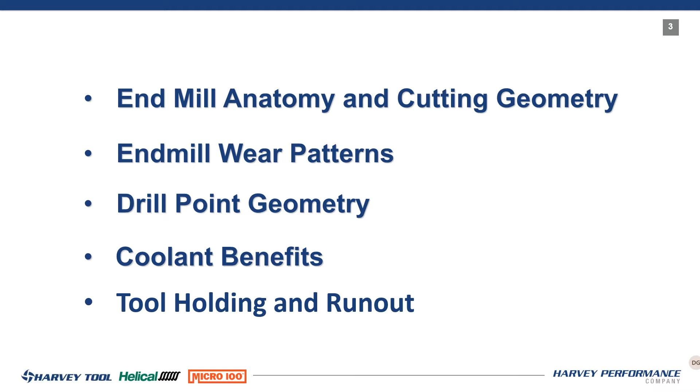So let's jump into end mill anatomy first of all. The first thing, which is the most common, is cutter diameter on an end mill. Every end mill has a diameter that you're actually speccing to your machine with that tool. The measurement is basically taken on the outside of the tool. We call it the margin, even though it's up sharp on end mills.

Some aluminum tools do have a margin on them, but it's taken usually on the first 10% of the diameter of the tool. Now, this measurement is actually what you're going to put in your software to control the dimensions that you put on your material that you're actually cutting. So I wanted to kind of bring this up with the cutter diameter to let you know.

Usually industry standard tolerances on an end mill, a 1/4 inch and up, is a -0.002 on the cutter diameter. So just be mindful of that when you're actually getting a 1/2 inch tool, that you either can mic the end of your tool or you can laser mic it, check that diameter and make sure you're inputting that information into your software to make sure that you don't cut it undersize.

Either that, or the fact that I am an old school machinist, you can tell it that you have an oversized cutter, in which case you'll stay away from your wall and you won't cut undersize. But critical cutter diameter is the number one. That's the OD of the tool running all the way through the shank.

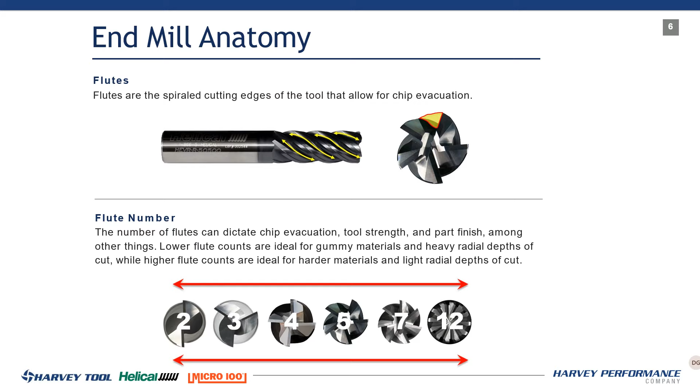You can do variable helix, where instead of being 38 degrees for all 4 flutes, it will actually be 38 degrees on one, 35 degrees on another, maybe 32, and then back with a 37. That'll give you variable helix to offset that flute and that vibration.

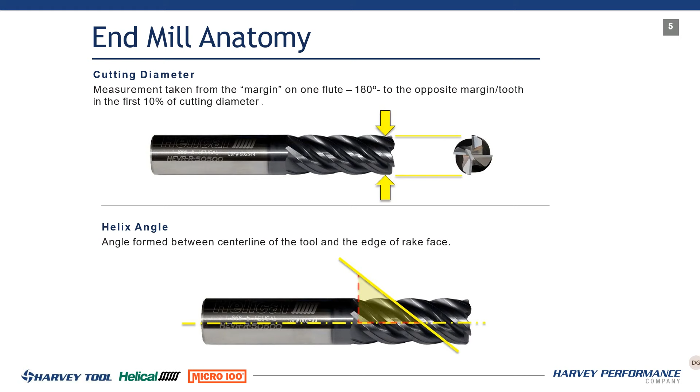You can also go with a progressive helix, where the helix starts out at 1 degree and then changes as it ramps up the spiral. So maybe it starts at 32 degrees and finishes at 38 degrees. There's really 3 ways to break up those harmonics.

Helical Solutions actually runs with a variable pitch. We've done testing - larger diameter works very well to run a variable pitch. Harvey Tool on the smaller tools runs a variable helix, so the helix varies on that. Works a little bit better on smaller diameters. Some cutting tool companies will do a combination of both, and there's benefits in that, while others will just change each one of those formats. But what you're trying to do is break up those natural harmonics, which is going to give you a bad finish, poor tool life, and chipping.

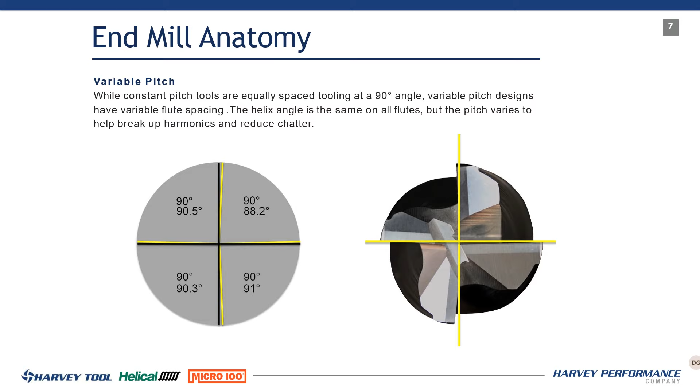So axial relief - if you look down at the end of an end mill, the end has to cut. In most cases, whether you're ramping or plunging, you need axial relief on the end of that tool. Basically there's a primary and a secondary relief in there. The axial relief on the end causes the tool not to rub - it gives it clearance, a primary and a secondary. So when you're ramping on the end of the tool, you're cutting on the corner, but you're giving the tool relief so the chips can evacuate and it doesn't rub and cuts free.

Now if you have one tooth, if you look at this 5 flute, you can see you have one tooth to center. Most end mills, solid carbide today in this market - I'd say almost all of them - are actually center cutting up to a certain diameter. You want to make sure if you're going to plunge with that end mill, meaning you take it and plunge straight down. Now, is plunging with an end mill recommended?

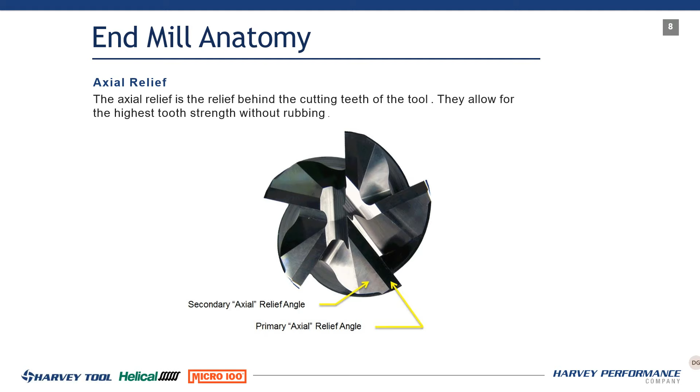No, I would rather see a helical ramp where you're actually spiraling down to make your cut to get to the bottom of a hole or surface. But will an end mill plunge? Absolutely, 100% an end mill will plunge. I would recommend if you're plunging to use like a G83 peck cycle or something like that with an end mill, because the chip evacuation on plunging an end mill is not very efficient. It's not going to work as well as using a drill or another method to get to the bottom of that hole. But the end of the tool needs clearance in order to do that.

Core diameter. Core diameter is very important to an end mill - it's what's going to reduce your deflection, and your deflection is what's going to cause all kinds of problems. So when we have a smaller core, we get maximum chip space, smaller number of flutes, and it decreases the tool strength.

So what we want is, in any application, to get the largest core as possible, especially when doing high efficiency machining where you're taking a long axial depth of cut and a light radial depth of cut. This is HEM - we're going to do a whole training on this, so I suggest you join us. The HEM presentation we're doing is going to be great. But when you're running these HEM techniques, you really want to start looking at the core of your cutting tool, because you don't need as much chip evacuation, and that core is what's going to help the rigidity of that tool.

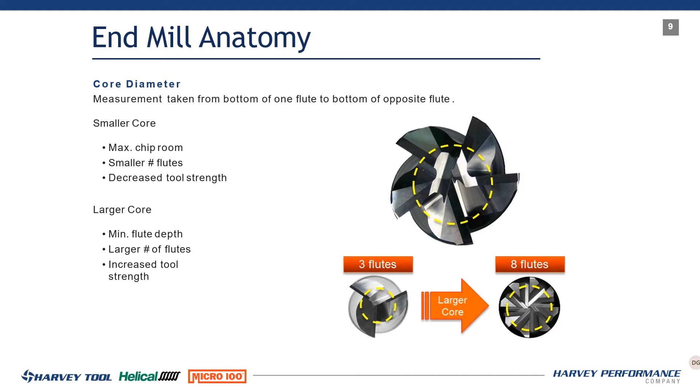Some people will do oversized cores, some will do a standard core - you can find different variations of this. It's good to consult your vendor for end mills to find out what core is recommended for your tool path. But core strength is key, and core strength is basically what's left over after the flutes are created on your end mill, or a drill too as well.

On a drill, it's called a web. I have this standing, not argument, with some people because I'm a drill guy, but it's a web on a drill, it's a core on an end mill. So just to differentiate those two.

So the end gash is pretty obvious. Really, the end gash on the end of the tool is there to support the end cutting geometry. It's giving you your chip space, creating your clearance. You have to be very precise in grinding all these features together. At Helical Solutions, there's a huge science behind creating this geometry because you don't want to overcut the gashing and make it weaker so it doesn't perform. But you also don't want to undercut it, because then you won't have enough chip space and you'll get the opposite effect. So the end gash is what actually creates your clearance for the chips when you're plunging, when you're ramping, to get them out of the end of the tool and to create your center cutting and everything else.

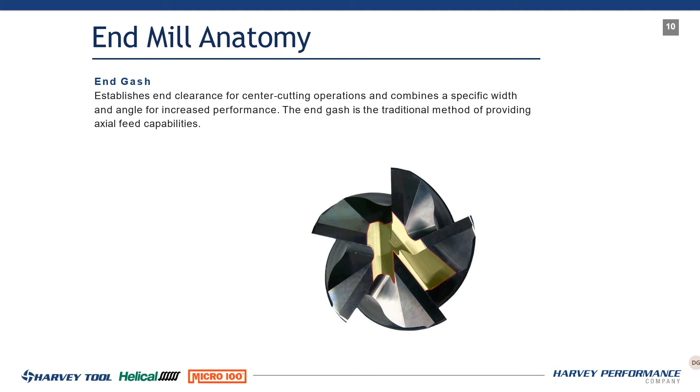This is the only animation I have on this slide. So there's my graphic. The TIR is a little bit off on that tool, but that's all I could throw in there for you. So let's talk about radial relief.

We talked about end relief, right? End relief creates the space we want so we don't rub when we're plunging and ramping down. On an end mill, we have radial relief, which is on the outside of the end mill. The end mill cuts on the side, peripherally. So there's three types of relief you can put on an end mill, all important when you're choosing the right end mill for the right material. They all have their purpose and they all work in certain materials in certain situations.

The first one is a cylindrical relief. Now, cylindrical relief is more seen in drills than in end mills, but there is cylindrical relief on end mills, mainly in non-ferrous end mills. What that means is you have a margin on the end of the tool that has no relief in it. It's cylindrically ground, round, as if you're grinding the whole tool. You're leaving a little bit of that cylindrical ground on there, and then doing a primary and a secondary behind that.

Mainly run in non-ferrous materials, mainly to stabilize the cutter as it cuts. A sharp cutting edge in non-ferrous material is going to want to grab, chatter, chip, do all that stuff. But by adding a margin on the end of that tool, microscopic, depending on how large it is for different materials, it will stabilize the cutter. It will get it to stop chattering, depending on what kind of axial length cut you're making. So that's your cylindrical relief.

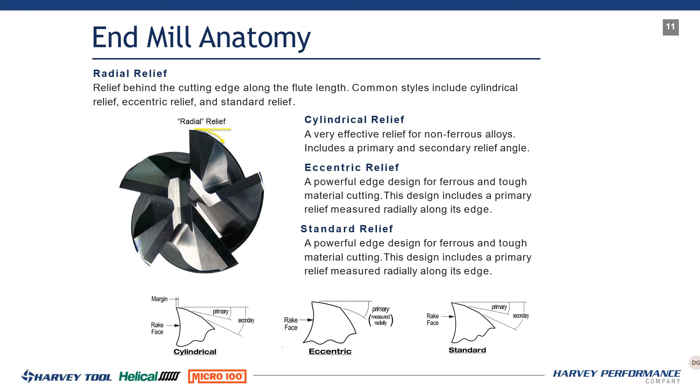It'll prevent rubbing, but it'll also give you one of the weaker cutting edges as well. So those are the three reliefs: you have a cylindrical relief, an eccentric relief, and a standard relief. Hopefully that helps explain the geometry a little bit more. We can get into more detail at a later date.

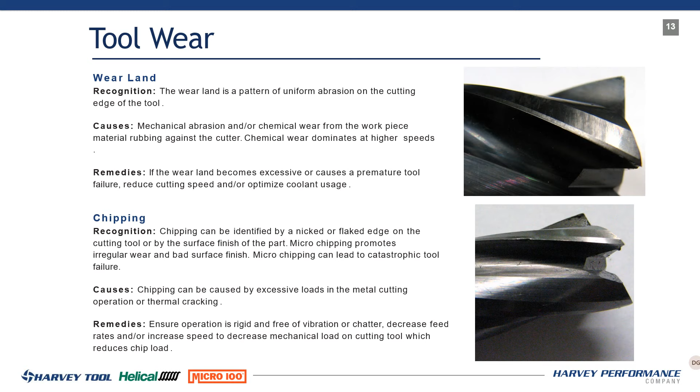That's what happens if you have the ideal situation — your work holding is good, your spindle's good, you're not running out, you're not hanging out of the holder. There's a million other things, but we're trying to stay focused on how to fix the tool if you've identified all the other problems with your situation. Remember: if you're chipping, it's too much feed. If you have a wear land but you're burning up the tool and it's wearing out too quick, flattening the end, it's probably too much speed, too much surface footage.

So the next one's thermal cracking. This is a good one to dive into. In milling, cracks perpendicular to the cutting edge are the most common type of thermal cracking. These cracks propagate slowly and lead to accelerated wear and chipping.

So what causes thermal cracking? Ineffective coolant application, exaggerated temperature fluctuations, excessive feed rates. What we're doing is bringing heat in, then throwing coolant on it, cooling it down, heating it up, and that causes thermal cracking.

I don't have a theory on this, I get all my information from experience. It's always good to consult people that have experience. A lot of people ask me, do I run coolant? Should I not run coolant? What should I do with this material? How do you suggest that? I'm going to give you my insight on this.

It all depends on the tool path you're running. Tool path is king. With running an end mill, running all these tools, tool path is king. The first thing I'll ask you if you have a problem is, what's your tool path? Because if you're running an HEM or high efficiency tool path—your adaptives, your dynamic milling, your MasterCAM, your iMachining—heat does not become a problem as much as it used to in traditional tool paths.

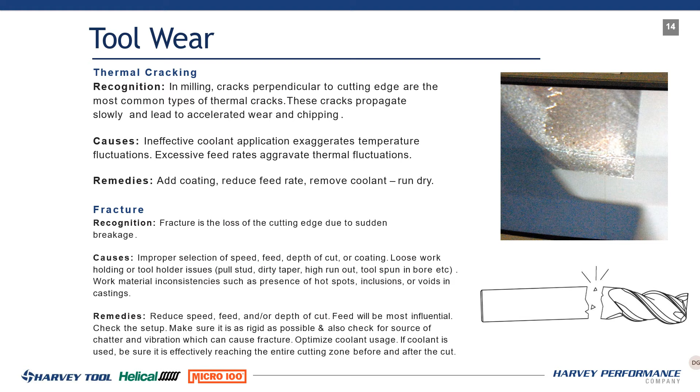So the remedies are pretty obvious. If we're breaking, the force is going to be huge. The first thing we want to do, once we've identified there's no problems with everything else, is look at the force on that end mill. Carbide's very resilient, it's tough—it's going to want to perform to the best of its ability. So if it's breaking, there's something induced in your environment that's causing that tool to break. We need to dissect that, find out what it is, and get it fixed.

So to wrap this up, there's two basic problems we have with tool wear: thermal stresses and mechanical stresses. Your thermal stresses come from workpiece inconsistencies. Let's talk about the workpiece.

Let's talk about the material we're cutting. This is a big thing as an application engineer—we purchase stainlesses, alloy steels, low carbon, high carbon, super alloys, Inconels, and stuff like that. Do we know the consistencies? Are we buying from a reputable place? Are there hard spots in that material? What are the workpiece consistencies and inconsistencies?

Work hardening is a big thing. Certain materials, austenitic stainless steels, Inconels, want to work harden. If you're not taking the right speeds and feeds, you'll make the next cut harder than the first. Usually an end mill likes to settle in and make that first cut thinking everything's going to be straight and good. So if you start work hardening your material by not taking the right depths of cut, that end mill won't survive long, and that could give you catastrophic failure.

When we get into drills, work hardening matters too. How many times have we done a lot of tapping in austenitic stainless steel and the tap keeps breaking, and we think the taps aren't working? I'm telling you right now, it's not the tap's fault—the drill is probably not doing its job. The drill is probably work hardening the hole, and that could be a lot of your problem. So be mindful of work hardening in certain materials and make sure you're taking the right chip load so that doesn't happen. Heat resistant materials are really huge for work hardening.

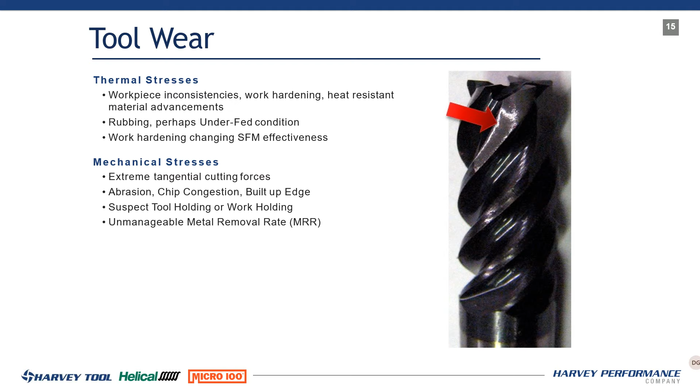I have a thing called the MRR triangle that we'll be launching in another video. Just to give you a snippet and whet your appetite for next time: the MRR triangle is basically three things you control to get the best optimal material removal rate, consisting of axial depth, radial depth, and feed per tooth. With this triangle you can do amazing things to fix your problem without changing cycle time or reducing tool life. Very, very good. That'll be coming soon.

So let's jump into drill point design and application. Like I said, I'm an old school drill point guy. I started, believe it or not, at a company called Precision Twist Drill in 1987—yes, that's how long I've been doing this. I started working on points for all drills, high speed, and then I got into carbide.

So very important—the drill point is one of the most important. No, wait a minute, not one of the most—it is the most important part of a drill. Let's look at a drill in three phases: a drill makes a chip, a drill carries a chip, and a drill gets rid of a chip. That's it. So your drill point is making your chip, the flutes are there to hold the chip, and the helix is there to evacuate the chip.

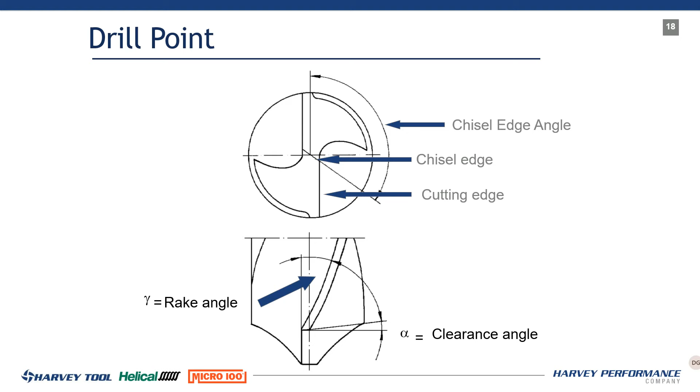It's very important to make sure the right point geometry is there for cutting your material. This consists of a chisel edge angle, which is the center of the tool, a chisel edge, a cutting edge, a rake face angle, and then you have clearance angle on the point geometry. This is where it's very critical.

So let's dissect the drill point. The drill point is the working end of the tool. That's what's doing all the work because it's making the chip. The chisel edge is the first point of contact on the drill, the center of that drill. The chisel edge creates the major thrust force, the force that's being put on that drill, whether it be high-speed steel, carbide, powdered metal, or ceramic.

I'm not sure if there are ceramic drills right now, but for some of the Inconels it's probably not a bad idea. So it's creating all that force. The chisel edge angle, its accuracy, along with the accuracy of the alignment of both cutting lips, control the hole's position, size, and straightness.

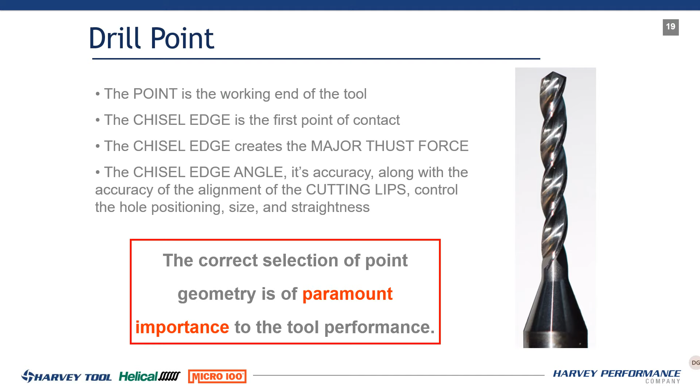So the correct selection of drill point geometry is paramount to the tool's performance. Because if you add force to the drill from the point, your hole is going to walk, you're going to get bad finish, you're going to break, crack, fracture, and everything else. So it's very important to create the least amount of force with the end of the drill because it controls the drill chip formation, the size and shape of the chips, and the chip flow through the flute.

It controls hole size and accuracy, controls the size and amount of burrs produced. The right point geometry and selection of point geometry is going to control the burr at the top of the hole and the burr at the bottom of the hole, the exit burr. This leads to increased secondary operations, deburring, flipping parts, and everything else. So you can get the right point geometry that's going to reduce that.

It increases strength of the cutting lips on the outside of the tool. What's the first thing to go? The outside of the drill—cracks, fractures. Right point geometry reduces cutting lip wear and reduces the amount of heat generation. Heat is a killer.

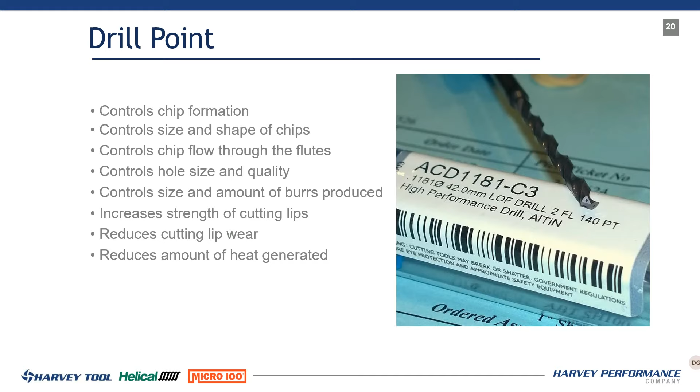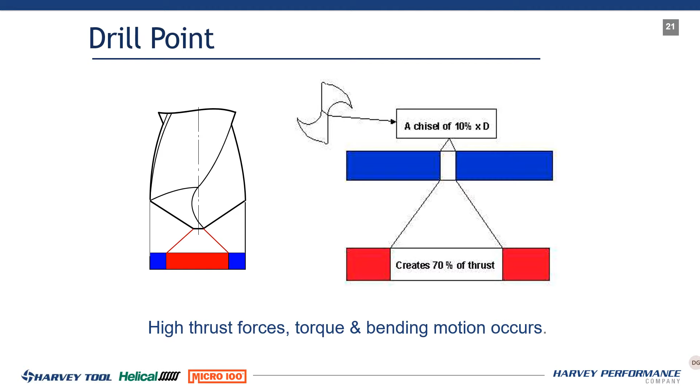So let's take a look at this. High thrust forces, torque, and bending motion occur. The chisel edge, the end of the drill, controls the web—remember, web on a drill, core on an end mill. The end of that drill, a chisel of 10% of the diameter, causes 70% of the thrust. So if we look at this as a standard drill, 10% of that diameter creates 70% of the thrust.

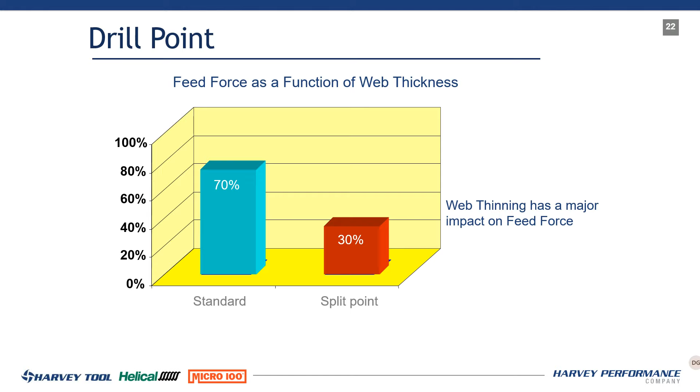If we can thin the web, find a drill with a split point geometry, you are going to reduce the thrust force on the drill by 40%. High speed drills are a little more prevalent in cases where you don't have the web thinned, but the split point has a lot to do with the thrust force on the end of the drill. It will reduce the thrust force by 40%.

Split point drills are very critical, typically 140-degree split points. The main advantage is reduced thrust force, but that's not the only thing. It manages the chip formation and gives you a couple more cutting edges, so it's going to break up that chip, make it a little smaller, and help evacuate it through the flutes. It also improves centering ability, helping the drill self-center.

High speed steel drills will walk a little bit more; carbide doesn't walk as much. So if you're even using high speed or cobalt drills, you're going to want to find a drill with a split point, and you might not need to spot the hole. When I use carbide drills, I hardly ever recommend spotting in some cases—though there are advantages to spotting. But if it has the right geometry, the right split point, it will self-center itself.

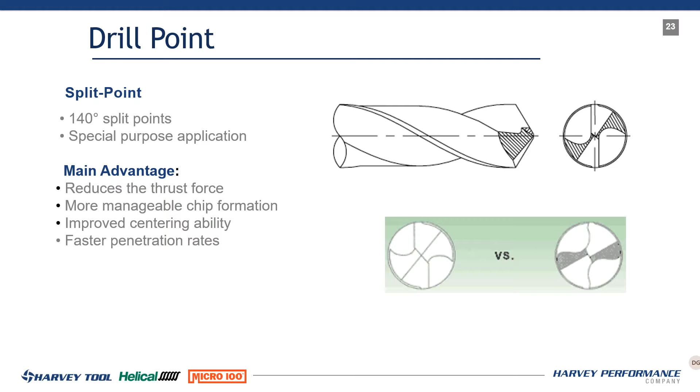And you can get faster penetration rates too. So now maybe instead of running 2% of the diameter on a feed, we can run 4% of the diameter. Or instead of 2 thou per rev, we can run 4 thou per rev, just because of that split point geometry that's actually on there.

So let's take a look at the coolant benefits, and then we're getting close to wrapping up here. Bringing coolant into a situation where you're using an end mill or a drill actually serves three purposes, not just one.

We're not just cooling - the whole word coolant sounds like coolant, but we're cooling the heat zone. That's it. But number one, and first and foremost, running the right coolant system, whether it be a flood system...

...or a through coolant, really helps and assists in evacuating the chips. Very critical - one of the main killers in end mills is recutting chips. That's a huge thing, we do not want to recut chips. And if we don't want to recut chips, we either got to use an air blast or we got to get that coolant to move the chips out.

That's number one. Number two is it provides lubricity at the cutting edge. The coolant not only is going to cool, but it's going to add lubricity. It's going to make the chip slide down the flutes easier. We're trying to add the right coatings to the materials to take the porosity out of the cutting edge, to give the slickest surface, to make sure the chips don't adhere to the cutting edge. Very important in your titaniums, very important in your aluminums. We need the coolant to add lubricity.

And then number three, offers heat dissipation, right? We want to reduce the heat as much as possible. Taking the right strategy, the right tool path is going to help do these things, but adding the coolant is going to benefit. Remember before when I talked about, should I run coolant, should I not run coolant? These are the things and the advantages - with me personally, where I've run tests for hours with coolant and without - these, I think, are some of the benefits you actually get by bringing in coolant. You're not only just cooling the surface, you're evacuating the chips and not allowing it to recut chips. You're adding that lubricity and you're bringing heat dissipation.

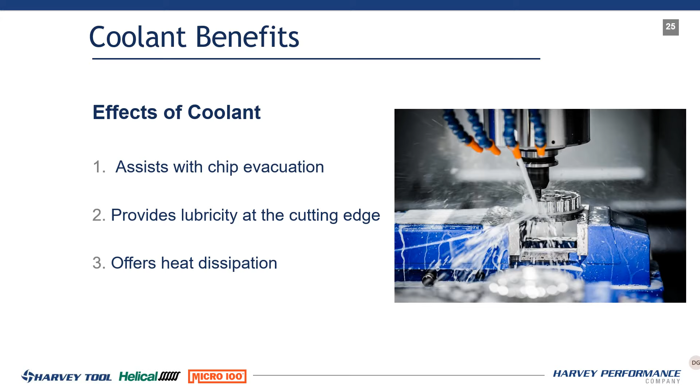Now, there are reasons to not run coolant. Don't get me wrong, I'm not saying that there's not situations not to run coolant. Coolant sometimes is an added cost. I think it's a savings, but sometimes it can be an added cost, and it can make machines a little bit dirtier and dingier when it comes to that. So very important.

So let's take a look at a good, better, best scenario. If you look at these three situations on coolant benefits, you got a good situation, which is like an MQL system where you're just kind of putting coolant on intermittently. So you're not really getting the benefit of the coolant flush, but you're getting the lubricity and you're getting a little bit of cooling effect.

The better situation is where you're running a flood coolant, where you got your lines coming around, you're actually flushing the chips. Even if you're drilling where this scenario is showing, you're getting the coolant all the way down to the point of the drill. You're going to get that a lot better with a coolant flood than you will with like an MQL system, because it's really going to get you when you're pecking, or it's just going to add that lubricity to the outside of the tool as it comes out of the hole.

And then your best situation, even on end mills, is a coolant through situation. Whether the coolant through is actually coming out of the flutes, out the OD, or whether it's coming out the end of the tool - this is going to give you, especially in a drill, all the coolant concentration right at the point of the drill. The most important part of the drill is the point. We want to get the coolant down there. We want to make the chip down at the bottom, we want to curl it. And then the coolant that comes out the end of the drill is going to flush those chips up the flute with the right coating and give you ultimate tool life, ultimate productivity.

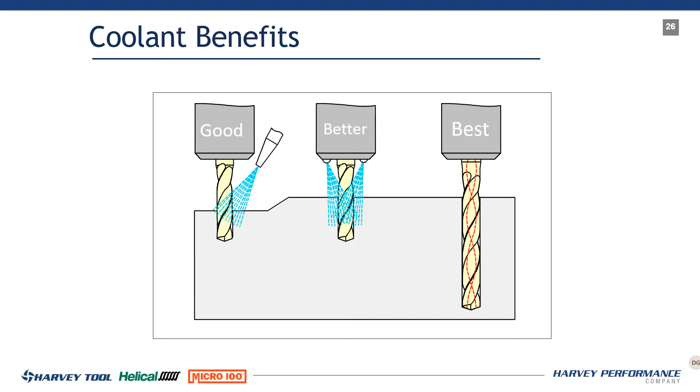So let's kind of just close up here with tool holding and run out, because I think this is very important to close out everything we talked about before. Because if you don't have the right tooling, and you don't have the right holder, and you don't have the right run out of your spindle, then all that time you put into getting the right geometries on your end mill, getting the right geometries on your drill, all that effort you made and consulting is going to be wasted in a poor tool holding situation.

So we need to use the right holder, whether that holder be a hydraulic holder, whether it be a shrink fit holder, whether it be a high precision collet holder, whether the projection is correct on that. We want to make sure we grab the right holder.

Keep your holders clean and in good shape. Very important to make sure the holders look good. Now, we talked about coolant, right? One thing to bring up with holders in good shape and coolant is make sure you have the right concentration on your coolant and it's maintained. Because if you run a lower concentration, you can see these holders start to rust and oxidize, and you're going to have problems. So it's important to maintain the right levels of concentration in your coolant, and yes, it will change depending on what material you're actually cutting. Keep that in mind too.

Don't maximize your ER collets. I've seen this a lot of times. What does this mean? Very simple: don't use a quarter inch end mill and use a 9/32 collet. Will it work? Yes. Will it ruin your collet? Probably. Will the TIR be sacrificed? Absolutely. Try not to maximize your collets. Now, I told you I've been doing this for 32 years. I'd be lying if I told you I never did it myself, but I also had to pay the consequences of poor tool life and the rest of it.

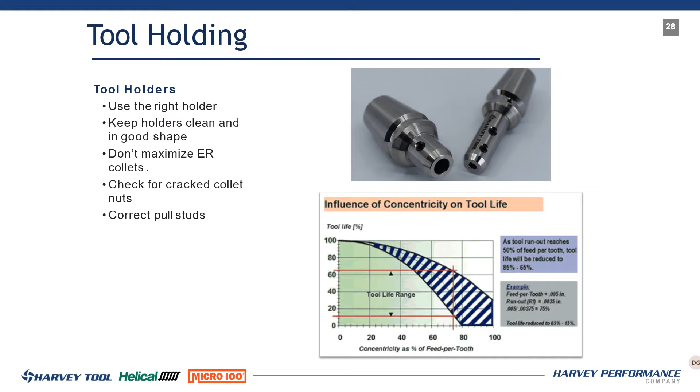If you look at the influence of concentricity on tool life, if you take a tool that's running out 50% of the feed, your tool life will be reduced to 65 to 85%. That's a rough number, I can't pinpoint it exactly, but that means if your feed per tooth is 2.5 thou and you're running out 1 thou or 2 tenths, you can sacrifice your tool life by 65 to 85%. It's critical to make sure run out is good and you're using the right tool — not grinding the shank and sticking it back in the holder. For every tenth of TIR run out, you're looking at roughly 10% of tool life lost. So it's important to make sure all that is checked.

It will also decrease your part finish. Not only does run out decrease tool life, if you're looking to get a certain RMS or RA on your part, TIR can directly sacrifice the part finish because each tooth is going to cut unevenly — one tooth takes a little more of the load. And when you get into micro tools like Harvey tool, down at 10, 15, 20 thou diameter end mills, think about how that TIR really affects your run out. So it's very critical.

Usual suspects: spindle taper condition, drawbar backlash, tool holder, wrong pull stud, previous crash. Nobody's ever crashed a machine, right? I said that in a presentation before — I've never broke a drill, an end mill, never crashed a machine. And if you believe that, then yeah, COVID-19 isn't going on either, I guess. But no, that's how we learn — we crash these things, but make sure the machine's in good shape.

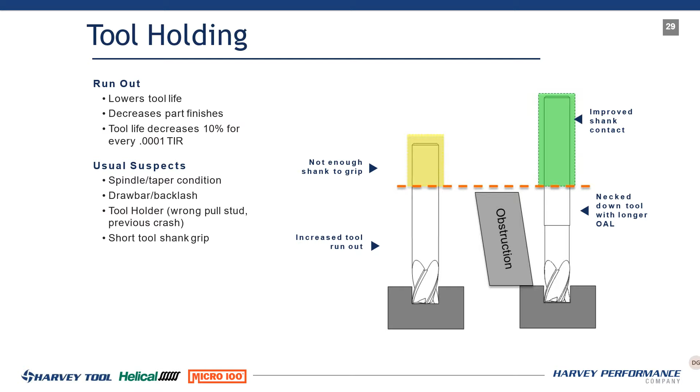Short tool shank grip — this is another one. If you're trying to go over toe clamps or obstructions, make sure you have a minimum of 2 times the diameter in the shank. That's a minimum; I'd like to see 4 times, 2 times the diameter up in the shank — that would be great. We've all pulled them out, we've held on to that. That will create TIR and all kinds of run out issues. So make sure you're not using shorter lengths of cut to run your parts.